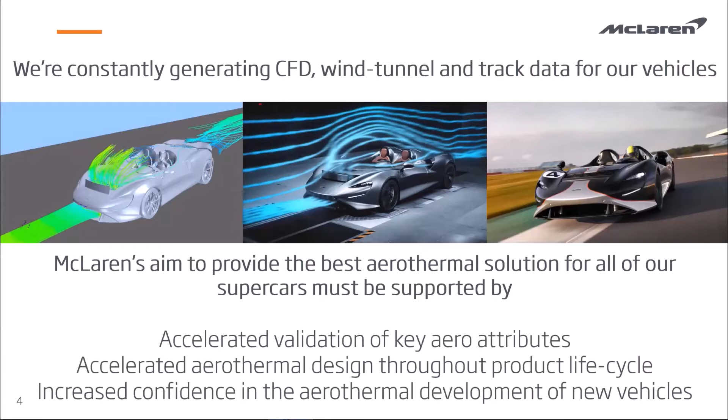Project Adam enabled Loughborough University to use digital engineering tools on hundreds of McLaren Aerothermal's legacy wind tunnel test and CFD data points, helping McLaren uncover trends, blind spots, and correlations that are now readily available to be used by our thermal engineers during future vehicle developments.

This is simplistically shown here in this picture at the bottom, where rather than a black box, I used a McLaren orange box, which Gary is going to talk about later, effectively providing a connection and an enabler for our data to unlock deltas, trends, and confidence bands by adopting digital engineering techniques.

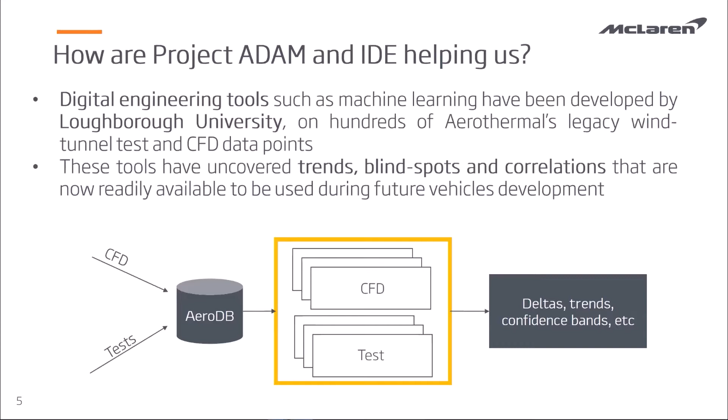Finally, looking at the bigger picture, Project Adam has helped McLaren unlock 4 key aspects. The first 2 are a higher technology readiness level for our prediction tools and increased confidence in our virtual design tools, effectively accelerating the validation of key aero attributes.

The third aspect is about showing how a full virtual validation and virtual aerothermal design development don't feel too far away in the future anymore, and we can actually drive and design our technology roadmaps to accelerate a full virtual vehicle validation even more, thanks to Project Adam.

Finally, the fourth and final one is about really equipping our aerothermal engineers with increased data-driven decision-making capability at project level to help make the best and most robust choices from a risk management point of view.

This concludes my very short presentation, and along with Arthur, our head of aerothermal, we will be happy to take any questions in the Q&A session afterwards. Thank you. Thank you very much, Piera. A fantastic summary of the project, and I know we'll have some interesting discussion later in more depth.

So let me now introduce you to Professor Gary Page. Gary, are you there? I'm hoping, there he is. There he is. Fantastic. Gary, are you okay to take us through your presentation? Yeah, so you can hear me. Can you hear me correctly? We can, yeah, perfect. Excellent. Over to you. Okay, thanks for the introduction, Piera.

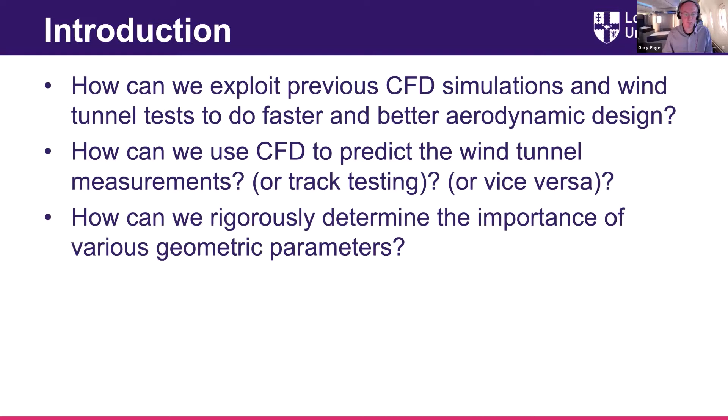So what we're aiming to achieve, and we've pretty much almost achieved that, is a single aerodynamic model that takes all past CFD and wind tunnel data. And the bit we haven't yet done is the road testing for multiple cars and variants. So the single model can predict any car with any parameter.

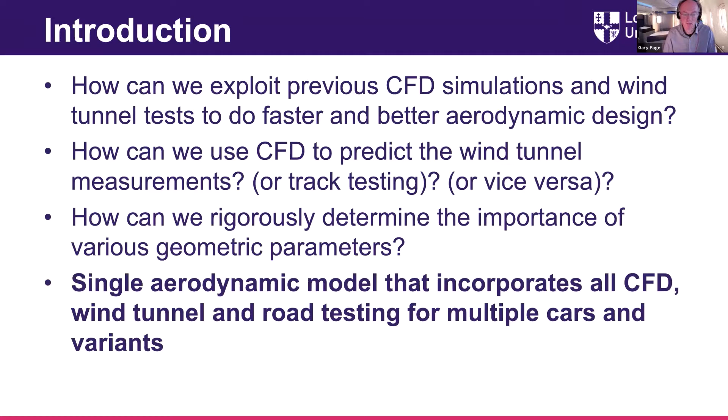So just taking a little bit of a step back, one of the things you'll see with machine learning approaches is in general they need a lot of data. The technique we're using, Gaussian process regression, is not so bad for that, but nevertheless you need a lot of solutions. So one of the parallel aspects of this is automatically extracting parameters from past calculations,

because it may be that the past calculations have not been well defined in terms of things like wing angle or ride height or whatever. And so we need to confirm that actually the CFD simulation was what you think it is, etc. We may want to extract new things from those simulations.

So the piece of work that Victor did was fairly specific to McLaren. So this is working with McLaren's ways of setting up CFD and using STAR-CCM+, which is a bit of a contrast to the regression aspect, which is actually completely generic and doesn't really even need to be aerodynamic data. And in essence, STAR has its own ability to have Java macros inside that you can run to do various things.

And so what we have down the bottom right-hand corner here is a general flow chart in terms of a piece of Python code which will generate commands to launch STAR-CCM+ and then to run the macros.

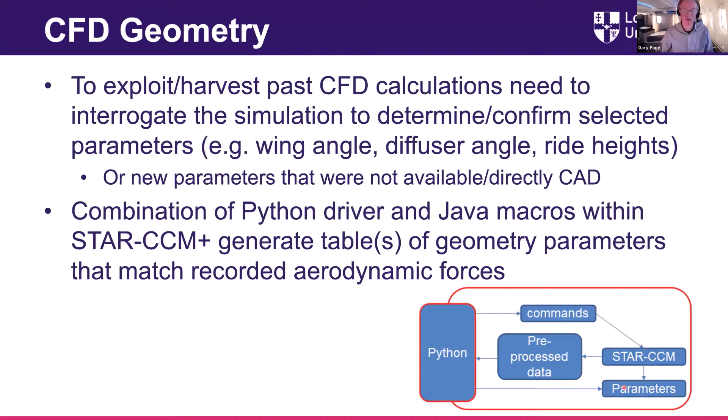So this is one example. Victor's done quite a lot of different attributes, but this is just one example. The first thing to point out is, although we have demonstrated this on actual McLaren simulations, what I'm showing here is a publicly available CAD. So that McLaren P1, you can go on to GrabCAD and download what looks like quite a complete piece of CAD. And what we're interested in for this example is this rear wing.

So the rear wing is relatively complicated in that it may have a variable height, it may have a variable angle, and its profile is not that simple either. So the simplest example here is where we use the macros within STAR to slice through the wing and extract the data points of the wing. And then it's a really simple matter to find the leading and the trailing edge and then figure out the angle. And because the leading and trailing edges are quite sharp, that's relatively straightforward.

The other thing we want is the wing area. And if we just looked at the projected area in the Z direction, then as the wing changes angle, the projected area would change, which is not correct because the wing area itself hasn't. And so then what we do is change our viewpoint by rotating through that alpha. So we're now normal to this purple line here, and then take the projected area in that direction. So that way the area of the wing is independent of the angle that it's at.

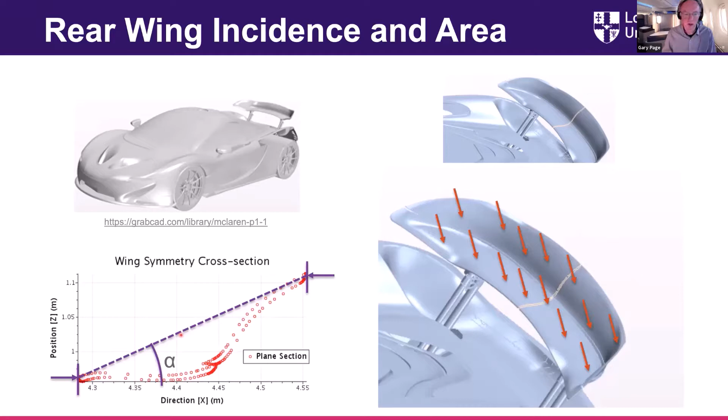Then there's a few other things you have to be a bit careful of. So one is correction for ride height or rake. So the CFD is generally set up in a wind tunnel coordinate system rather than the vehicle coordinate system. So the angles we extract from that wing are based upon the wind tunnel.

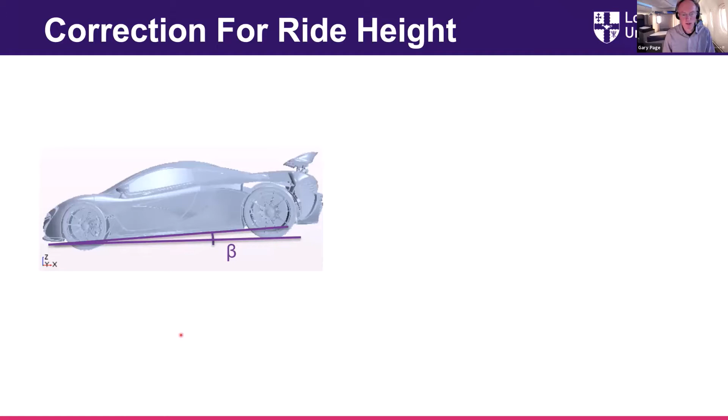And one of the problems is that if you make the car at a really different ride height, as we're showing here, which is sort of exaggerated, then as we change the ride height at the rear of the car, it changes the angle we're measuring from the wing. And that's quite critical for machine learning, because if we then put that wing angle into the machine learning model, we'll get a change in lift and drag, and it won't know whether to attribute that to the change in ride height or the change in wing angle, where in reality the wing is not changing relative to the car, it's only the ride height.

So again, that's relatively simple in terms of measuring the ride height and subtracting that out. So it's not a complicated thing to do, but it's quite important to ensure that your input parameters are independent of each other, because if they're dependent upon each other, the machine learning can't figure out which one is the important one.

So Victor's done that for around 15 parameters. So for example, at the wing, we also look halfway out at the angle and look at twist. And it's relatively easily extensible to more. So for example, if you have a device that looks a bit like a wing, you can take the technique to do that. And it also currently will work on folders of solutions and traverse them, pulling out the data and creating it fairly automatically. And typically it's a few minutes for each solution. So probably within a few hours, depending how many you've got, you can pull all your data out from a set of tests.

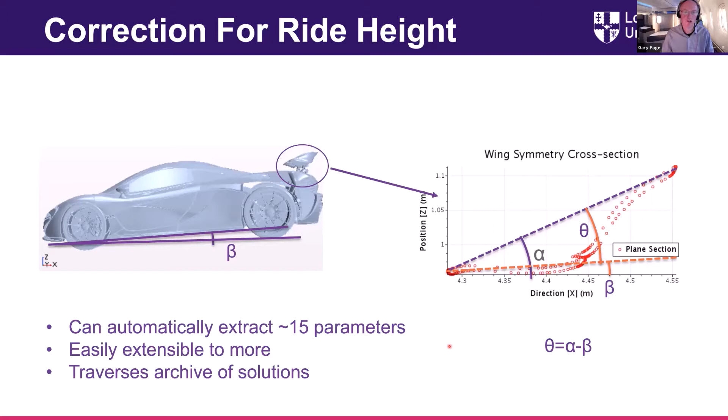Okay, so that's a little bit of an aside in terms of some of the things you need to do, which comes back to that message, you need plenty of data. And I'm going to go into the actual regression aspect. So what we're using is a technique called Gaussian process regression. And fundamentally, like any type of regression, we've got a set of data. And the key thing about this technique is the data can be quite noisy. It's designed to deal with noisy data.

And I've also put the word observations in there because one of the things we found in this project is translating between the computer science language and the engineering language. To computer scientists, it's an observation rather than a data point. And essentially, to sum up, we want to fit a function to that data and we want to use it to make predictions of other data points. And in a few sentences, that sums up what is actually quite a complicated process.

Right, so what can we do? Okay, so I need to take this quite slowly because this looks like a simple graph. There's a lot going on here. So we have a 7-dimensional number of inputs. So to plot the data, I need 7 dimensions, which is clearly not going to happen.

So what we have to do is to show, say, a variation of one input, how drag varies in this example against input 6. And we're slicing through this design space. So we have to fix all the other parameters. The other 6 parameters have got to be fixed. And the way we've done that typically is to look at the data we have and find the most common occurrence of, say, the value for input 1, and we call that our baseline.

That may not be the baseline the engineers used when they did the CFD or the wind tunnel testing, but nevertheless, it's the most common occurring one, so that the slices we do are more likely to be where the data is. So what we have here is two different sources of data. One of them happens to be CFD, one of them happens to be wind tunnel. And you can see in terms of those red and the blue lines, some have more data and some have less.

So the first thing is looking at the blue line. You can see we've got a mean prediction and we've got a confidence, and we've got some data points we've plotted. But note we've used the word closest. So the word closest is because some of these points may actually be exactly on the slice. Some may be slightly out of the plane. So maybe this point over here, input 1 is not quite the baseline. It's slightly removed. And if we make it precisely on the slice, we often lose points.

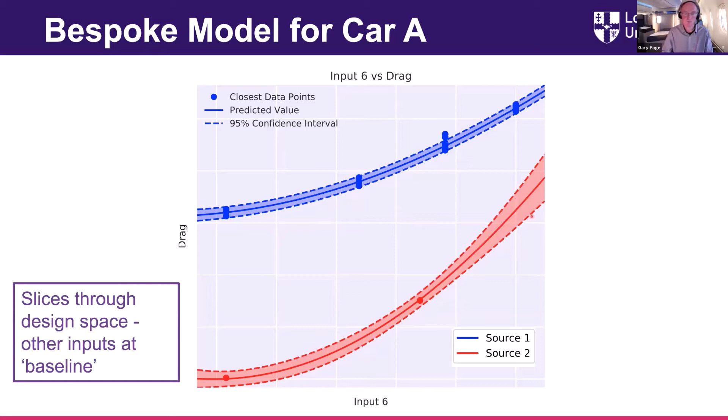So what's the problem with the bespoke model? Well, a good example is car E. So car E only has one source of data. It doesn't have the second source. In this case, it's got source 2. So we can plot source 2, but I can't predict source 1 because I've got no data. I've got no reference points whatsoever. So it can't use anything from source 2 to predict source 1 because it just has nothing. And that's where the co-regionalized model really works.

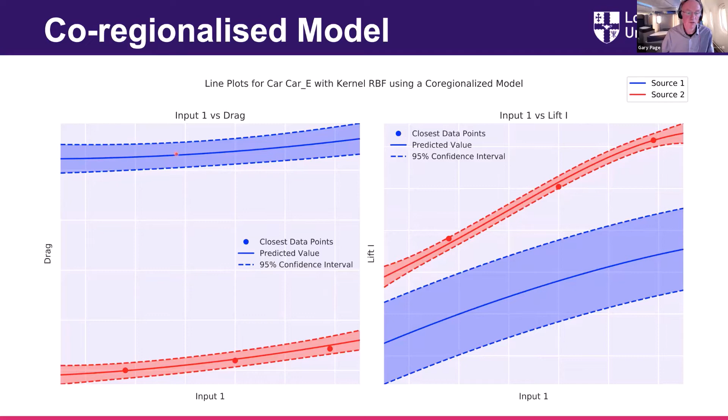The other great thing about some of the machine learning techniques is they have ways of processing the model to understand importance. So there's a technique called Sobol indices, which is a bit of post-processing, which takes a few hours to run, but you typically only do this once. And remember, the point is that all the stuff we've done has essentially been run on a 5-year-old laptop, and it takes minutes. This is not computationally expensive. This is the most expensive thing we did, and it's a few hours. But it basically does Monte Carlo testing on the model and then figures out how the various inputs affect outputs. So how can we explain the output variance for the drag and the 2 lifts?

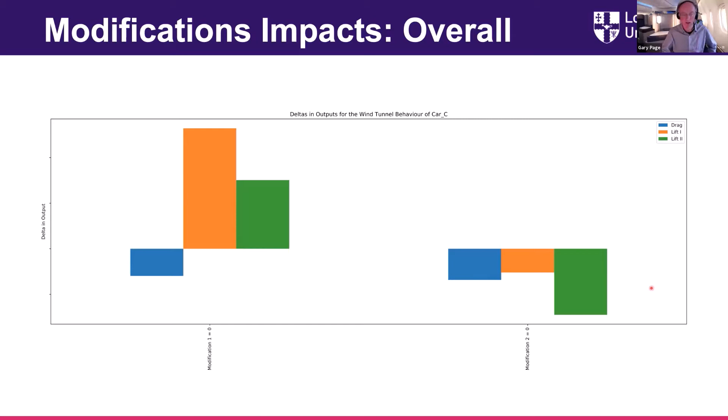So it gives you a simple rule of thumb. So we could produce a table of, if these modifications, we'd broadly expect this type of change to occur. But we can do a lot better than that, in that we can do it as a function.

Okay, so the last little bit is really going back to the validation. So what I showed before was, how does it predict the data we already had? But in reality, we want to say, well, how well can it predict data that we've never seen? So we sort of have to unsee some of this data. So this is a technique called K-folds, which is standard in machine learning. And this is just for one car rather than the full co-regionalized model.

And what we do is we take all the data and put it in a random order. So the data points are just shuffled up randomly, and we divide into 10 buckets. And we're going to call these folds. And so what we do is we take the first bucket out of the data, and we regenerate the model using the other 9 buckets. So we have a model that's based upon 9 of the 10 buckets, and then we test it against that first bucket we've taken out.